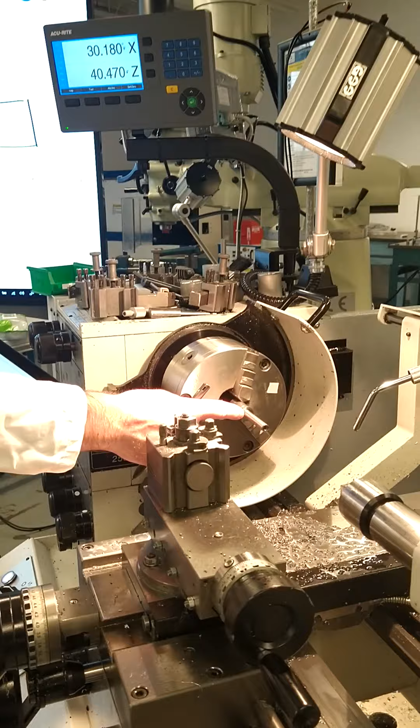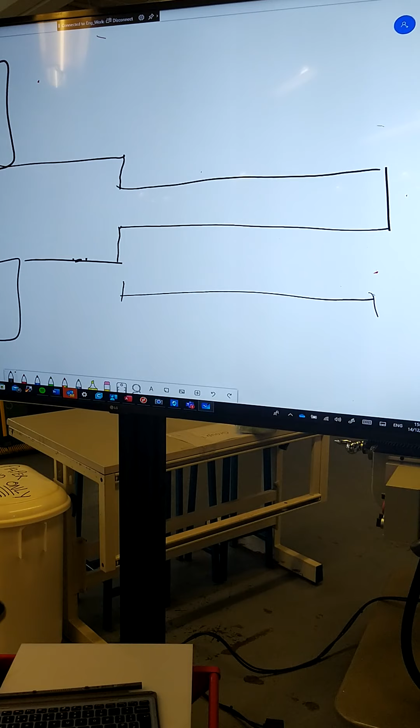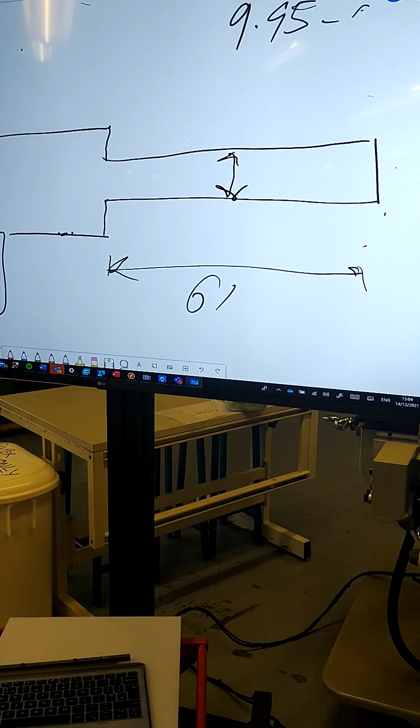Okay everybody, this second part of the video is to look at creating the angle here at 22 degrees. So what we've done is get the length from the end of the part in to 61 millimeters, and the correct diameter here inside our tolerance between 9.95, aiming for 9.99. That gives us the correct fit between H7 to G6.

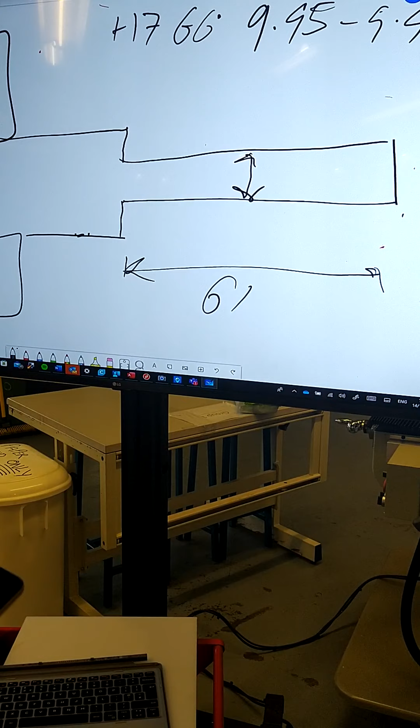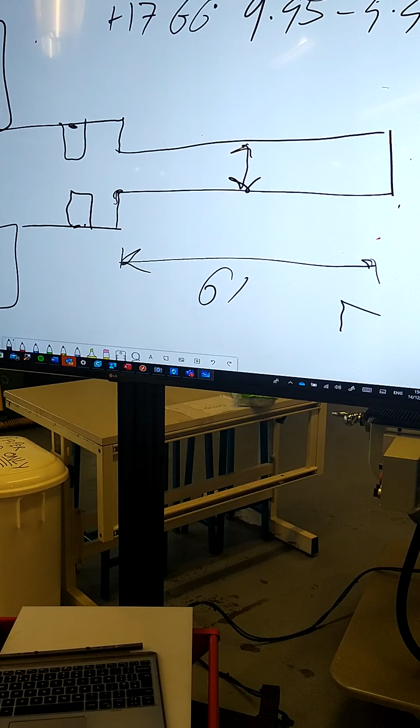What we're looking at here is we removed out this little radius that was left from the turning down tool with the parting off tool, and we created a groove of 5 millimeters in depth to allow us to create the angle of 22 degrees. So we've got the full length from here back to there to be 65 long with the parting off tool.

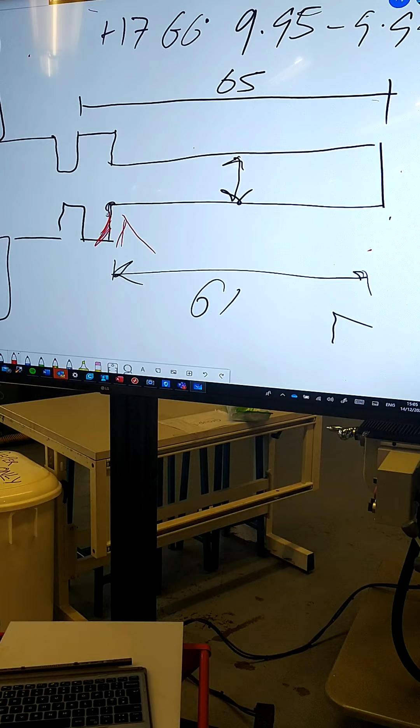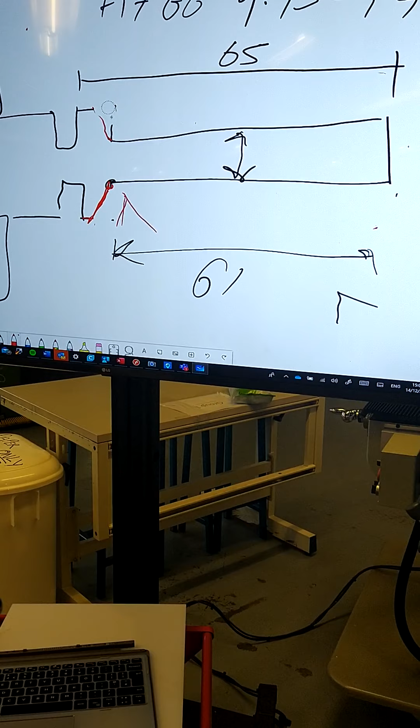Now the process is to create this angle using the 22 degree tool, coming in here to pare back this area, giving us the tip of the drill bit right into the corner, creating an angle to form the valve shape. So we're going to pare off that material, working our way in and removing the side surface from the part, which will create our 22 degree angle.

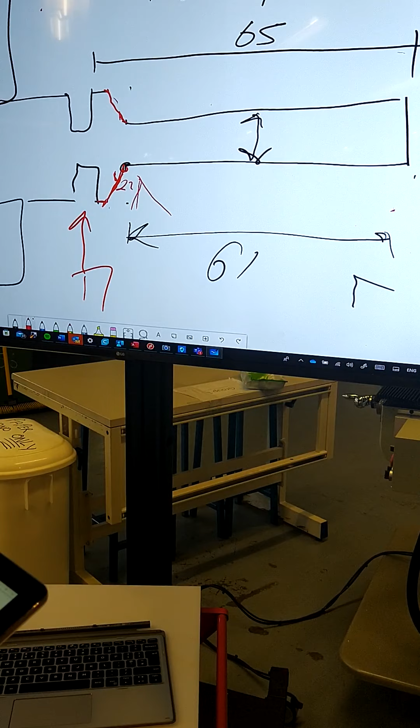And then finally we're going to come back in here again and part off the tool to finish. We have the chamfer done already, the half mil chamfer has been created, so make sure you have that chamfer created. That chamfer is between 0.5 to 0.8 - it says 0.5 on your drawings, but anywhere between 0.5 and 0.8 is perfect.

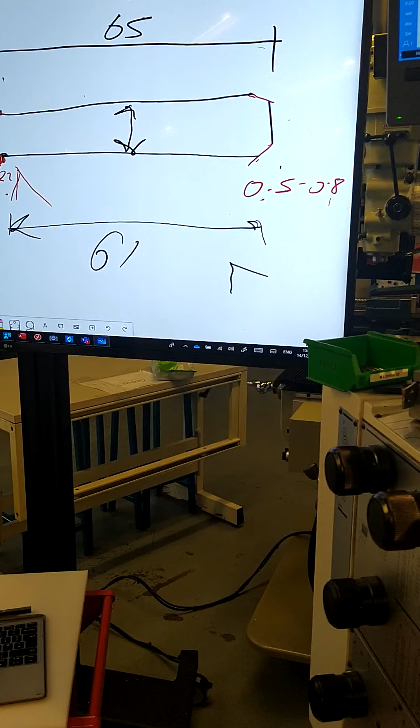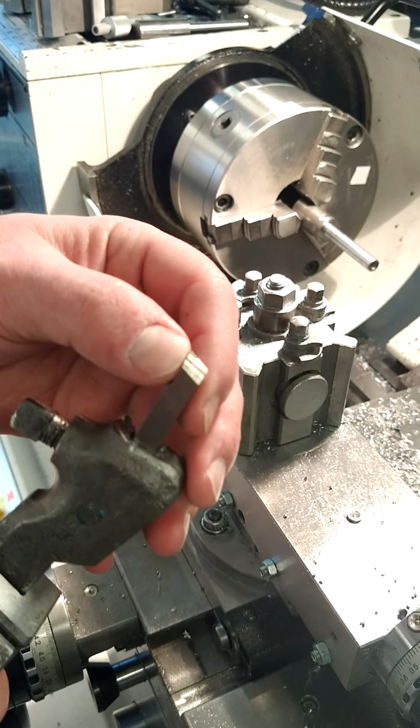So let's continue on with this piece. Get the correct tool from the store - previously we had these 45 degree tools, we've used them before in the past. This one now has an angle ground at 22 degrees, and you know by the little notch on the side of it here. Make sure you use the correct size one for everything to match up.

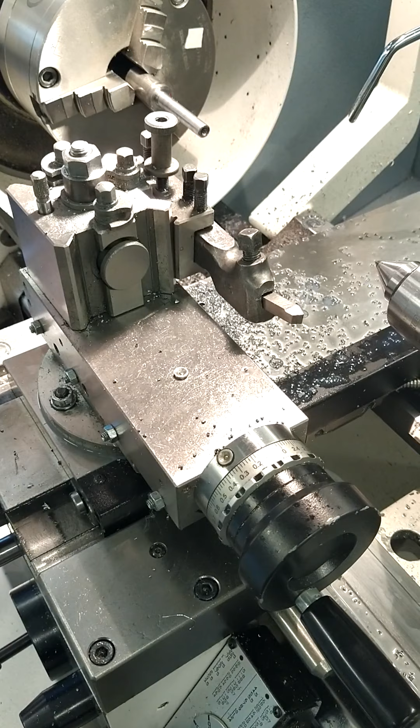We're going to get the tip of that form tool right into the corner, paring back on that surface here. So set the tool height up on center again - that's the first step, as we always do. So new tool height on center, adjusting across.

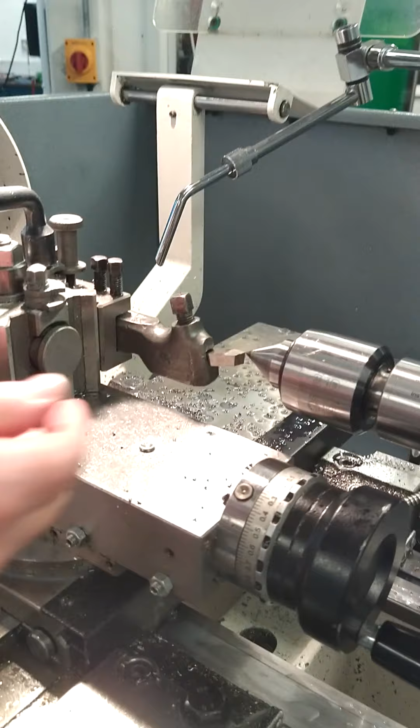Now you can also adjust here that the tip can be slightly in - don't let it out too far, if you let it out too far it will deflect when you're starting the machine. So it's approximately about there. You're adjusting up that height till the tip of that tool is lining up with the revolving center, until you're on the correct height. So there we have it, we're perfectly on height. That's done.

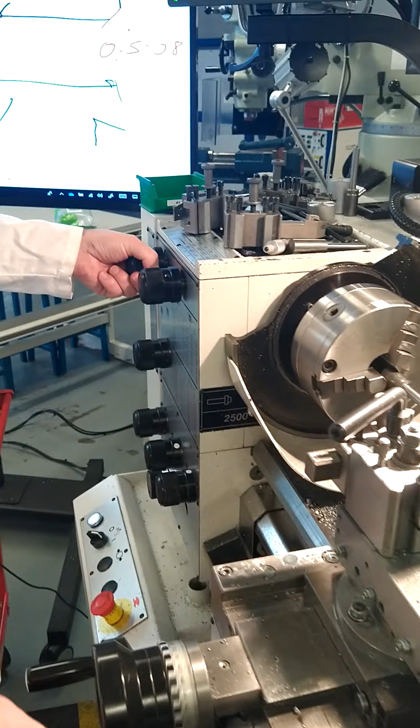Now, high speed steel or form tool steel - we need to reduce down our speed significantly here. Around 180 is recommended, that's the perfect speed to go on here, just because it's going to have a heating effect.

So to be very clear what we're doing, we're creating an angle here, 22 degrees. We're machining away basically this face - that's the face, that red. We're machining away all that material to create the angle, getting the tip of that tool right into the corner, and the angle will be created back here perfectly, following the steps.

So the step is then, bring the tool over, and at the reference point you don't need the coolant this time around - just touch the tool off the part, zero it, just as a reference. You want to get it fully back to zero to ensure we're back in there in the corner. So you start the lathe about 180, powering on, and then making sure you support the work, keeping everything on center.

And now, visually, you're just starting to pare back to create the angle. So I'm adjusting in now, and I'm starting to machine back. As you see, that face inside here, I am still working in till I have all that red on the flat side face of the cone.

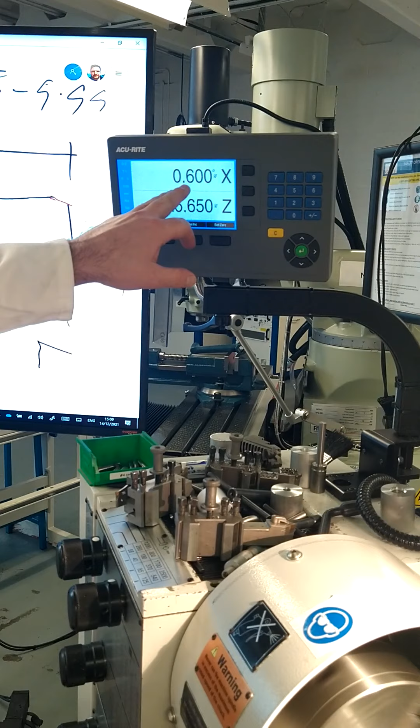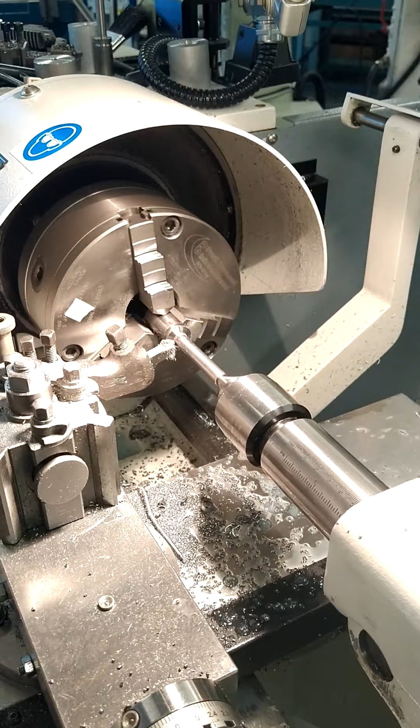So you keep on going to get the tip of that tool right into the corner. So see, it's right in the corner now. And as you're right in there in the corner, the next step now is just to adjust in here at this point, give it to zero. This side. So there we have it. We can clearly see that the tool is right in on the corner of the edge. Gone right into the corner. So we've no longer a flat surface, and that's the job we have to do there on our part.

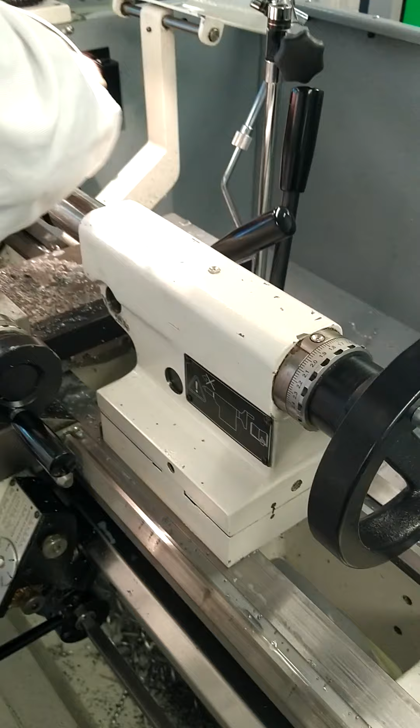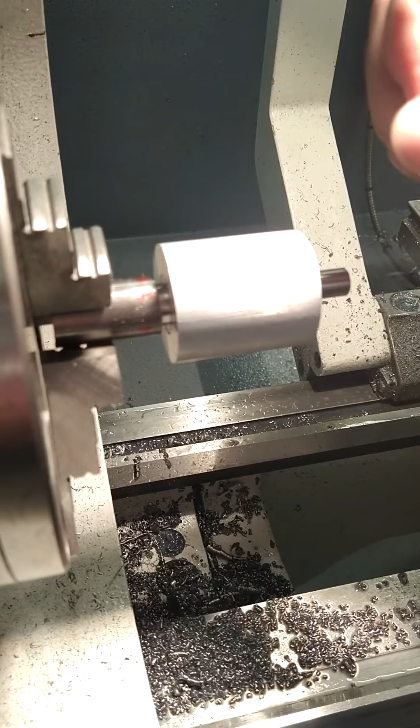The final stage then is just, before I part it off, it's always good to check everything's fitting. So taking up your part, and you're checking then if everything is right, everything has been done correctly, positioned. You can see literally that those two parts are a perfect fit scenario. So they're perfectly smooth. So the hole that you drilled 2mm deep matches.

So this acts as a gauge. This is your no-go gauge. So if this is measured machined like so, then that gives us that thickness between 2, so we can check to see how we have a correct depth on our part every single time in our pieces. That's the idea. Now sliding on, fit our 2mm diameter.

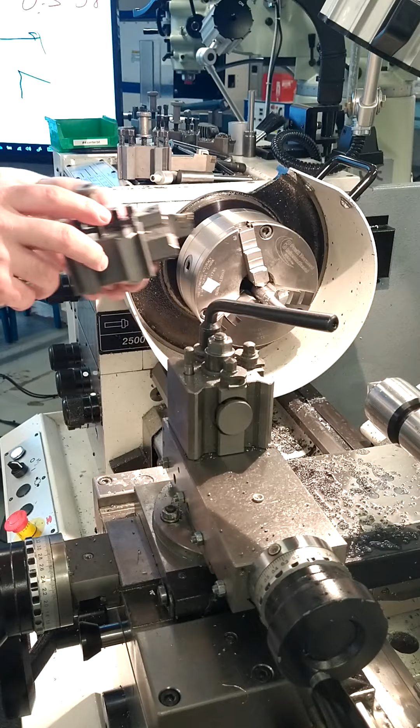Lovely. So now the final thing to do is to part off that piece. So I'm going to remove out and pop back in our parting off tool. So again, check the tool height. We've adjusted it up and down every time. So here we have a slight bit of adjustment needed up slightly. Okay, brilliant. Back into position for machining.

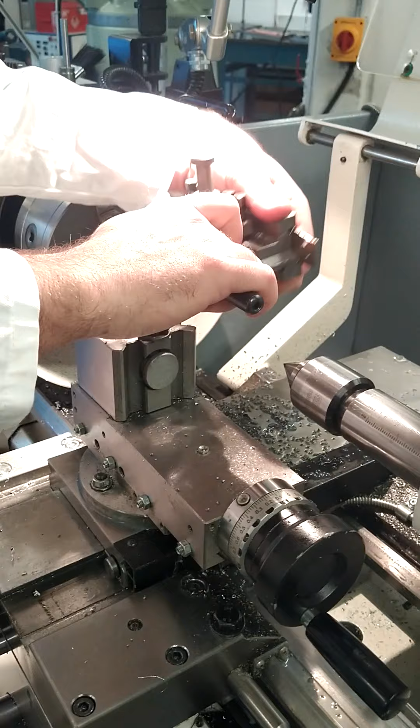And because we've created that pocket, it's a lot easier now to guide it into position. It's a lot easier now that literally you can just guide that tool back into the pocket that you previously machined. It's easy to get it back in position there again. And you create that pocket. That's why we created the pocket, so you can get back into position. So now we can see the tool, the parting off tool, is back in position.

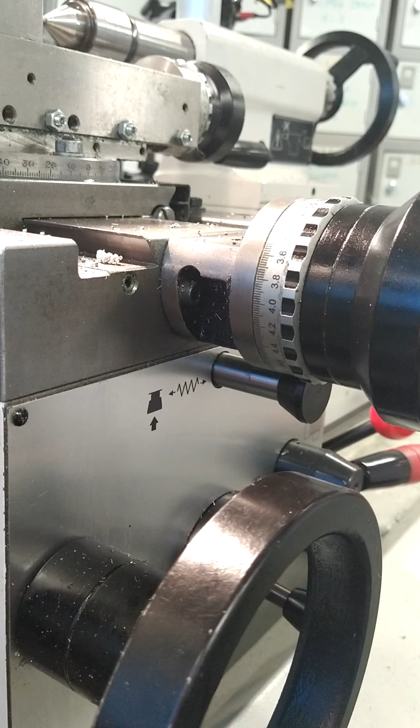I'm going to adjust out the direction for the automatic feed, which is here. Pulling that lever out. Our speed set then up to 800 RPM, so at 820 RPM. I'm going to apply coolant down top of the tool. Cool it down.

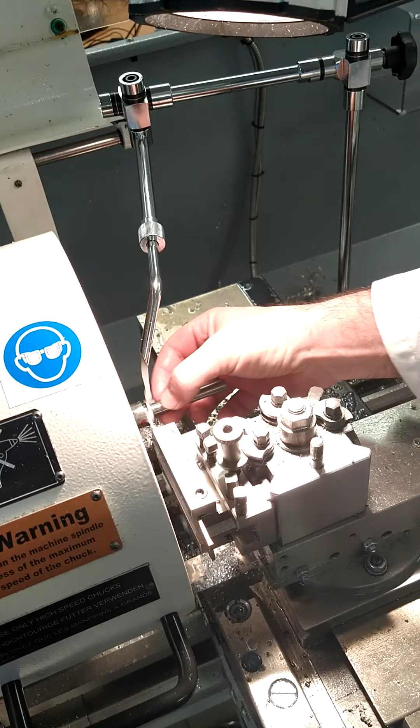So we have everything completed. Chamfered, make sure it's chamfered. Diameter is checked. Angle created 22 degrees, 2mm thick. Final stage now is to part off the piece. I'm just going to support the work one last time as we part it off. Powering the lathe on. And now you're just engaging the automatic feed to part off the piece. Making sure it's on height and center.

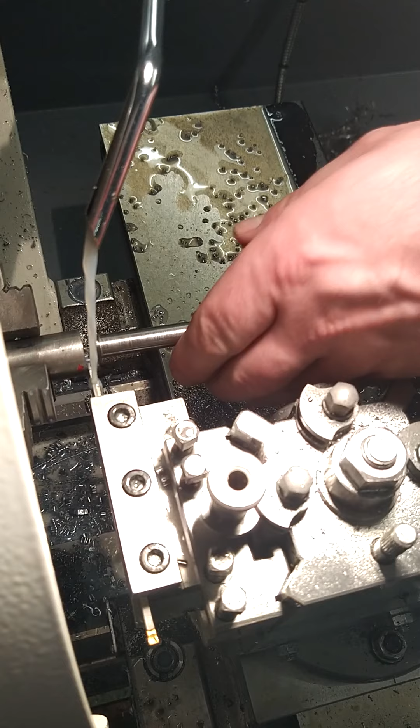And what happens sometimes is that the piece comes off, you get this, sometimes you could, and in other situations get this little part out from here. If that does happen, all we have to do there is just face off that small piece, and we'll do that now. Pause that.